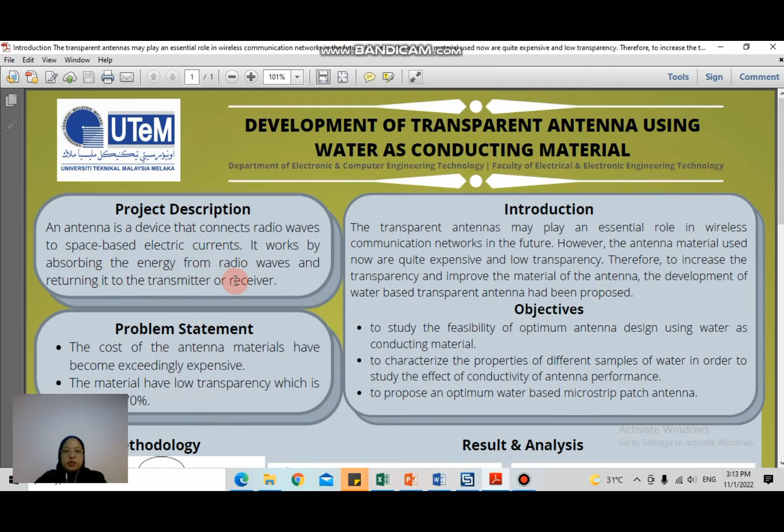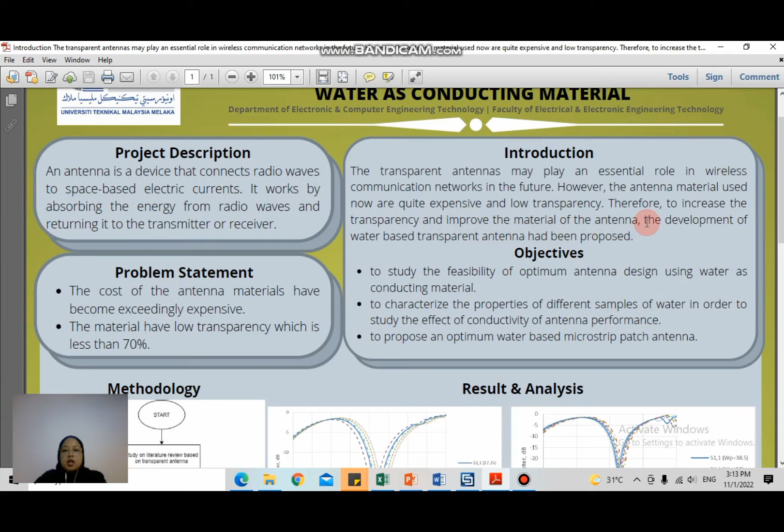For my introduction, transparent antennas may play an essential role in wireless communication networks in the future. However, the antenna materials used now are quite expensive and have low transparency. Therefore, to increase the transparency and improve the material of the antenna, the development of a water-based transparent antenna has been proposed.

The objectives of this project are: to study the feasibility of optimum antenna design using water as conducting material; second, to characterize the properties of different samples of water in order to study the effect of conductivity on antenna performance; and lastly, to propose an optimum water-based microstrip patch antenna.

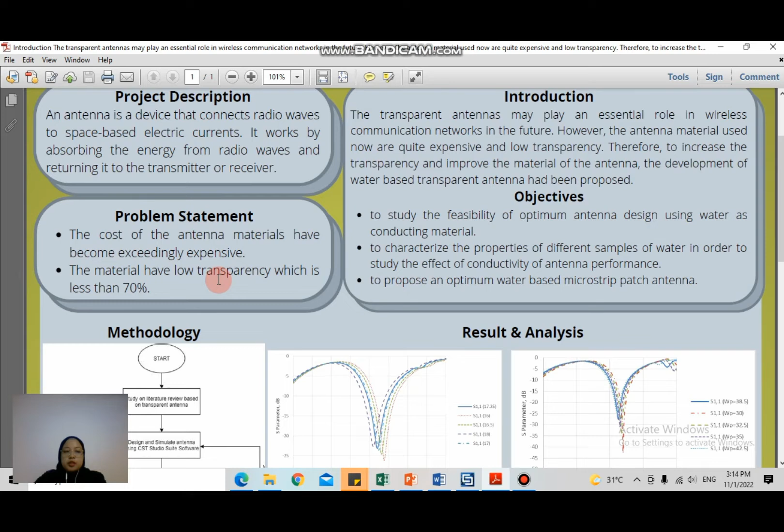The problem statement of my project is that the cost of antenna materials has become exceedingly expensive, and the materials have low transparency, which is less than 70%. And this is the methodology of my project.

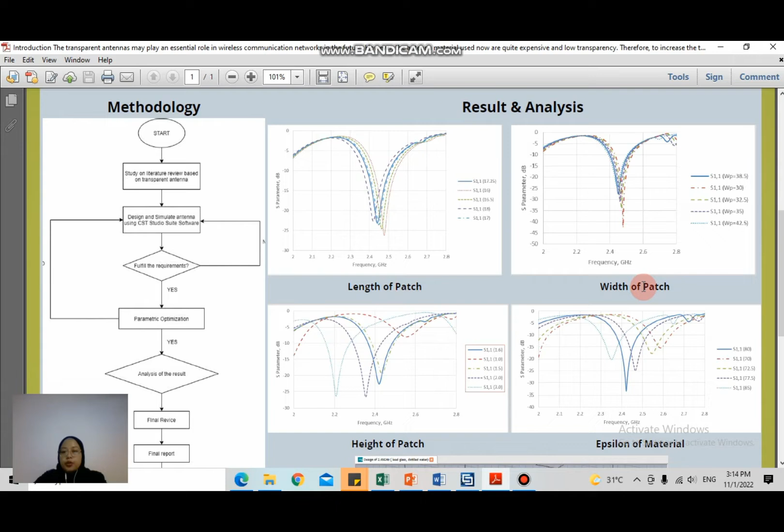This is my result and analysis of different parameters of my antenna, which are length of patch, width of patch, height of patch, and epsilon of material. For the epsilon of material, it contributes to 4 samples of water.

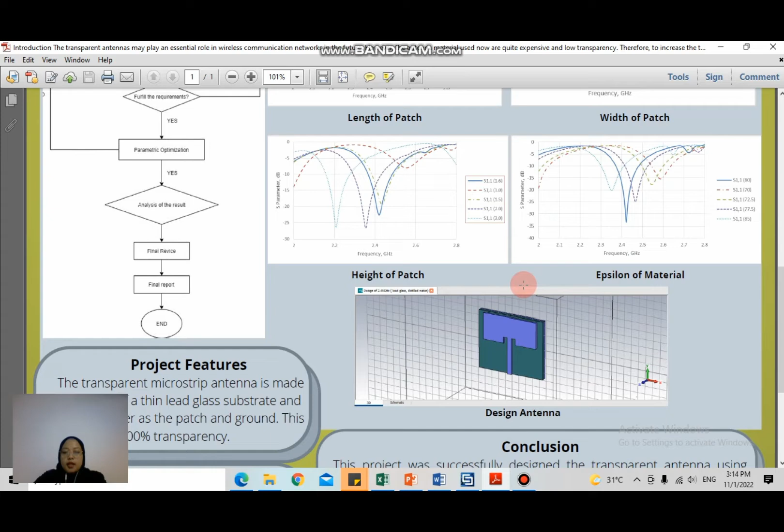And this is my design of antenna. For my project features, the transparent microstrip antenna is made consisting of a thin lead glass substrate and distilled water as the patch and the ground. This antenna is 100% transparent.

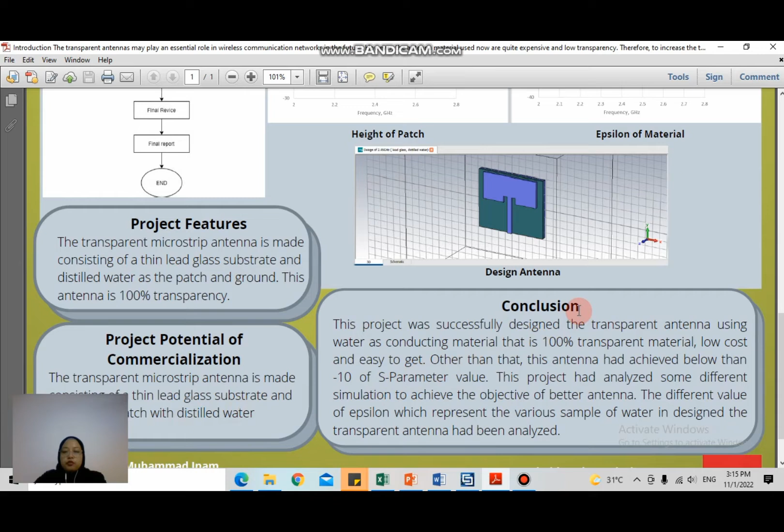For my project's potential of commercialization, the transparent microstrip antenna is made consisting of a thin lead glass substrate and the antenna patched with distilled water. For the conclusion, the project successfully designed a transparent antenna using water as conducting material that is 100% transparent, low cost, and easy to get.

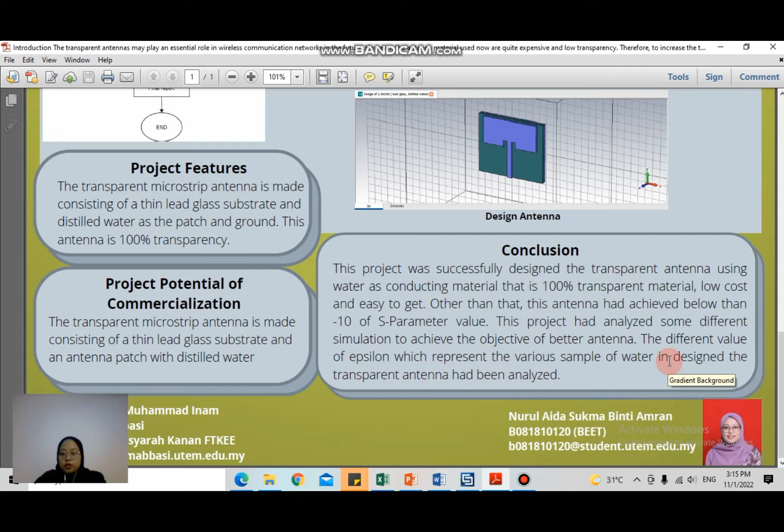Other than that, this antenna had achieved below -10 for the S parameter value. This project had analyzed different simulations to achieve the objective of a better antenna. The different values of epsilon, representing the various samples of water - 4 types of water - in the design, the transparent antenna had been analyzed.

That's all for my poster presentation. Next, I will show you my project demonstration. Let's go.

Before I continue my project demonstration, I will show you the 4 samples of water, which are seawater, tap water, rainwater, and distilled water.

For the design, first I will create the ground and patch using distilled water material. Then for the substrate, I use lead glass. Because this antenna is transparent, I use glass and water as the conducting material. For the substrate material, the permittivity is 6, and for the distilled water, the permittivity is 78.4.

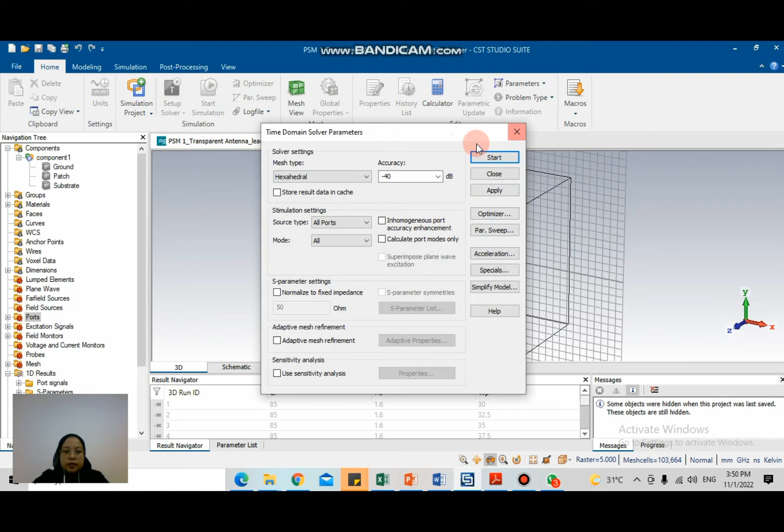After I designed this antenna, I add the port, which is at the bottom of the microstrip feed. After that, I go to the setup solver to run the simulation at 2.45 GHz. After running the simulation, it shows the S parameter value.

Before that, I use parameter sweep to run various parameter values to get the exact return loss and bandwidth to achieve better antenna performance. For the width of patch, I analyze from 30mm to 40mm.

I continue to run and get the graph. Next, I analyze the value of width of patch from 40 to 45mm, and I also analyze the substrate height from 1 to 1.6mm.

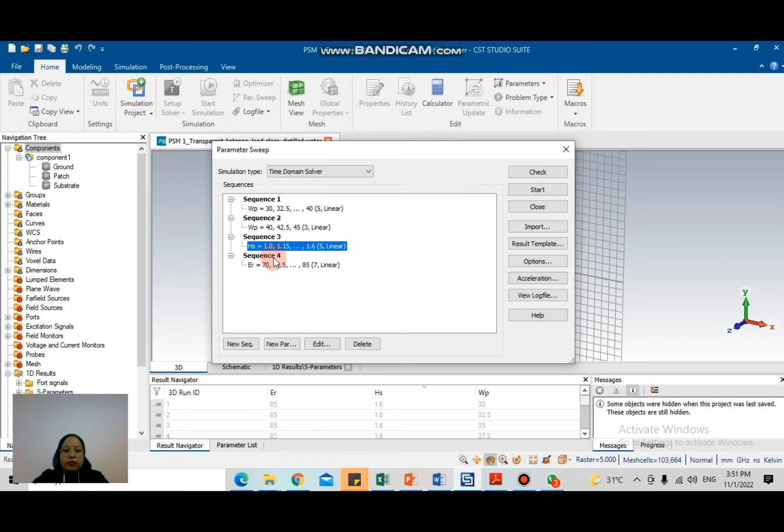Lastly, for different types of water, I use a new material and declare the permittivity, with the permittivity material named ER. I analyze using parametric sweep from 70 to 85.

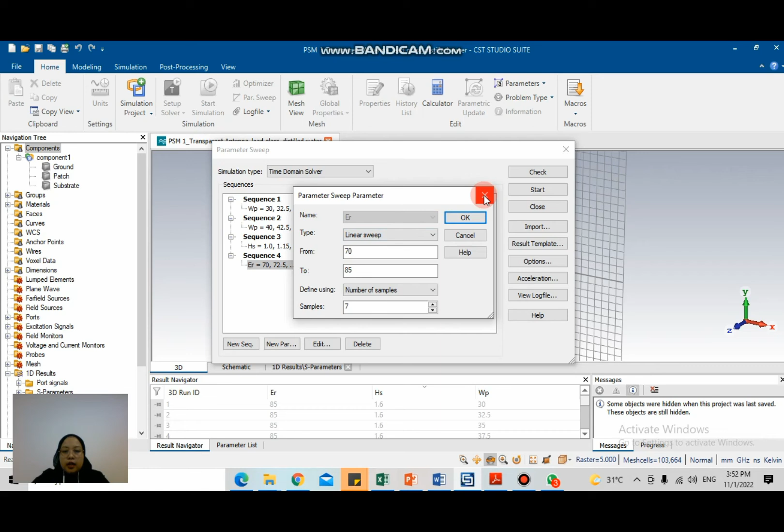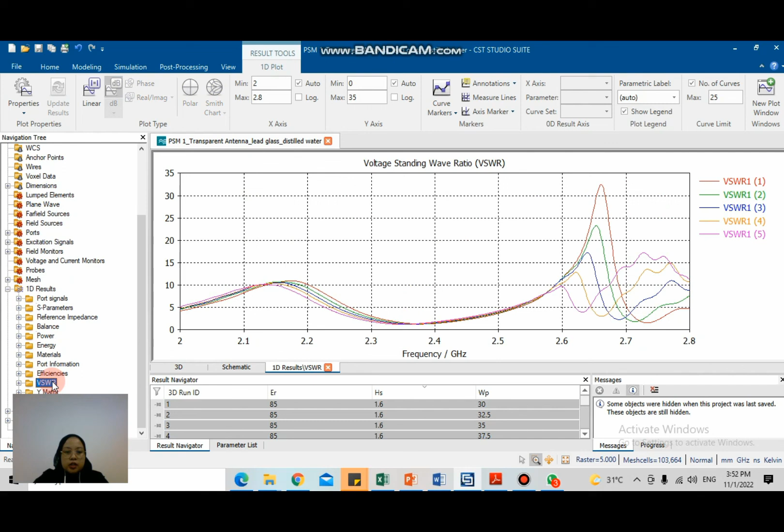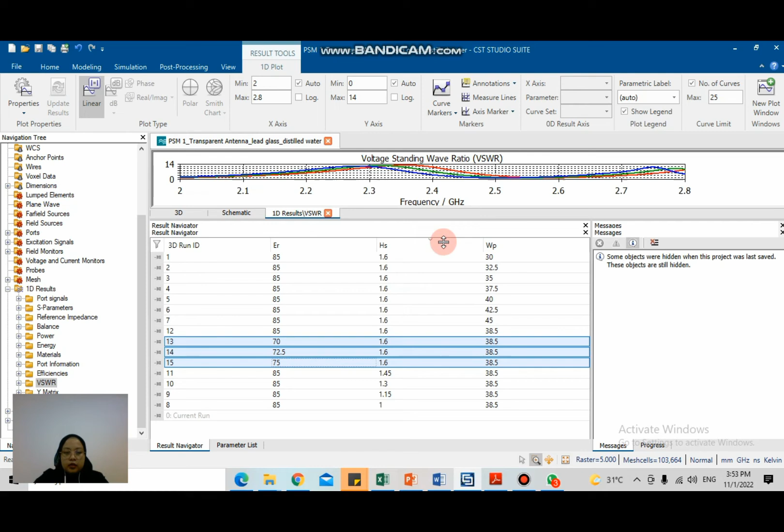Same also for epsilon, the permittivity of the material. I use values from 70 until 85, so the S parameter value will be different.

So from this, we can conclude the effect of return loss and bandwidth through different parameter values of the antenna.